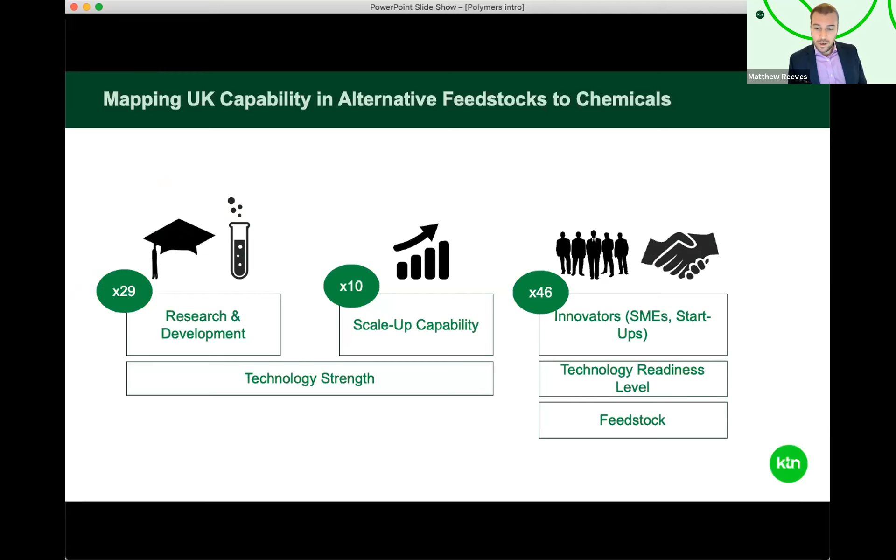So just before we kick off, I'd like to give you a brief overview of the context of the webinar series. Essentially, we are asking the question, which feedstocks will we be using to produce chemicals in 2050? One of the initial activities by my colleagues was to map out the research, innovation, and support work that's going on in the UK right now. And this map is available to view on our website, so I'd recommend going and checking that out.

So if we come back to the central question, the answer will greatly depend on the state of the oil and gas industry in 30 years' time. So one scenario that we can imagine is that oil and gas remains the central feedstock for the chemicals industry, and we achieve net zero by reducing energy consumption and capturing carbon emissions. But in another scenario, we drastically reduce our use of oil and gas and switch to other feedstocks like biomass, CO2, syngas, and/or waste polymeric materials, which expands the number of ways in which the industry can lower its carbon footprint and produce chemicals more sustainably.

But of course, to switch to alternative feedstocks like this and to use different processing technology on a large scale is not a trivial exercise. So what we're trying to do here is to bring together all the relevant stakeholders to facilitate the understanding of these new value chains, to identify the appropriate chemistry that needs to be carried out, to identify what some of the localized opportunities are, and to encourage different technologies and disciplines to come together and make the business case for change, but as part of a wider system.

And we can start exploring these issues today as part of a conversation around using waste polymeric materials as a feedstock. So without further ado, I'd like to bring in our first speaker, Dr. Martin Atkins, CEO of Poseidon Plastics. Over to you, Martin.

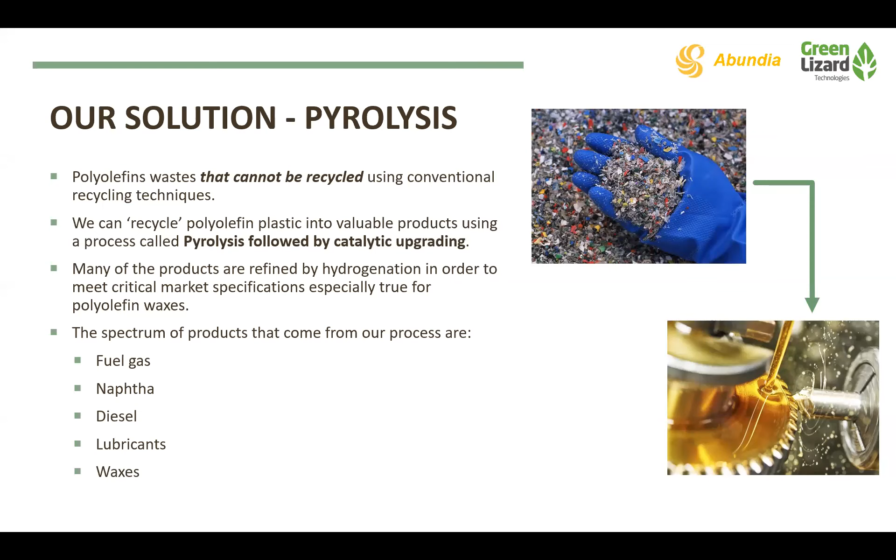So we look at the upgrading of the products, and most of these are by hydrogenation. So it gives us opportunities to move into the use of green hydrogen, which is something else we've been following closely with the KTN and some of the other activities in the UK. So we're really starting from the supply chain at the front, and we're looking at our partners developing the downstream with us for those products. So this is a bit more of the value chain that I've explained about there.

In one particular mode of commercialization, we're working with RiverRidge in Northern Ireland, which is a waste site. So we take waste directly from the MRF. It's collected. A lot of that waste is collected from the blue bins or the green bins or the black bins, as I'm finding out now, are also used extensively in certain councils. So we work with the site. We use real feedstocks that have been through the separation process.

The technology that we use is very robust. For the first generation plant, we use a flow system. They're rotary kiln-based systems. There'll be two approximately 20,000 ton flow trains on that particular activity. Our second generation, which is under development here in Teesside, is actually a very compact pyrolysis unit, quite an innovative reactor design, and that's primarily used to get very high yields of waxes.

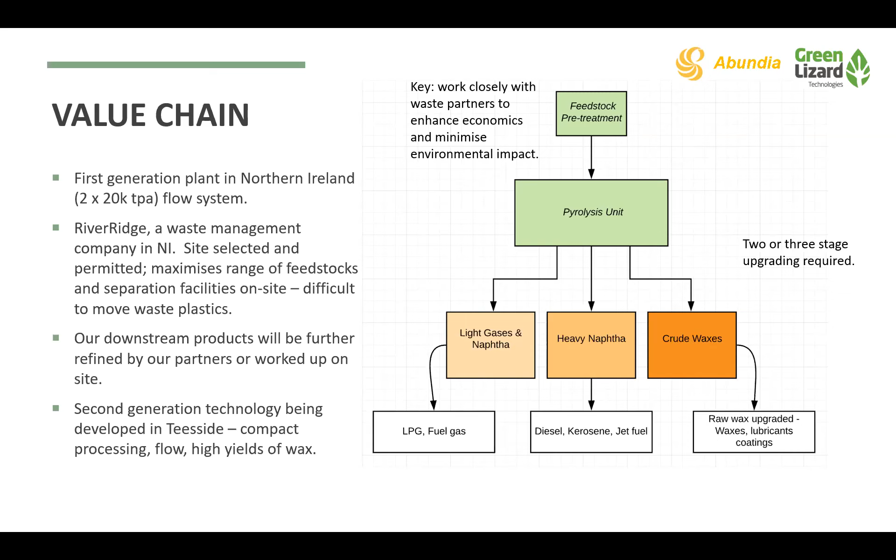But you see, when we go through these technology blocks, feedstock is very important. Our pyrolysis unit has to be robust to all the different types of contaminants that are in the feedstock to a certain extent. A lot of those impurities can be removed by units in the waste treatment unit. But things like PVC, you'll never get to 100% removal of those. You'll never get 100% removal of biomass, contaminants, bits of paper, and so forth. So the pyrolysis unit, whichever you look at, needs to be very robust to take advantage of cheaper and advantaged feedstocks at MRF.

So as I say, we're really looking at producing these waxes as the long-term goal for this project. It's a huge market. It's a $6 billion market. They're used in all sorts of applications. But on the way there, of course, you do make diesel, you make kerosene, and you make LPG.

So depending on the partner mix and depending on the technology that needs to be developed and the markets that need to be served, our technologies offer a completely, I guess, flexible process all the way from LPG right the way up to paraffin waxes. Our second generation is focused on a much more improved and compact system. So that was a run into plastics with Green Lizard and Abundia.

We're now coming on briefly to the Poseidon Plastics. This is a venture we set up about 18 months ago. This is already at Teesside. We've got our team here. It's in the Wilton Centre, so it's in the manufacturing catapult, and we're looking to put the UK's first chemical recycling of PET plant at Teesside here.

So again, I think a lot of you have seen this slide, or seen the top bit of that slide, many times. It takes us through the whole supply chain of PET resins, from the crude oil feedstocks right the way through to the resin manufacture. All different types of products, whether it be shirts, fibers, films, trays, bottles, coloured bottles, clear bottles. They're all produced and used in the markets.

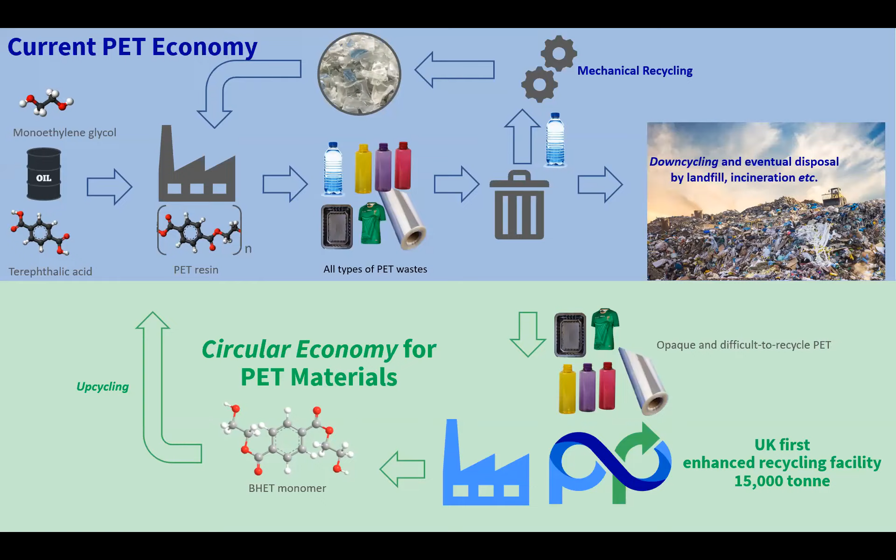So we're just finishing the feed study. We're going into detailed engineering, design and cutting steel early next year for the UK's first 15,000 tonne plant. Our technology is based on a glycolysis route. So we have a proprietary catalyst system and a solvent system in there. We use ethylene glycol to react with that catalyst with waste PETs of various descriptions. They then go through various separations where we purify the BHET for use in virgin PET production, and all the coloured components and contaminants are recovered or reused in another part of the process.

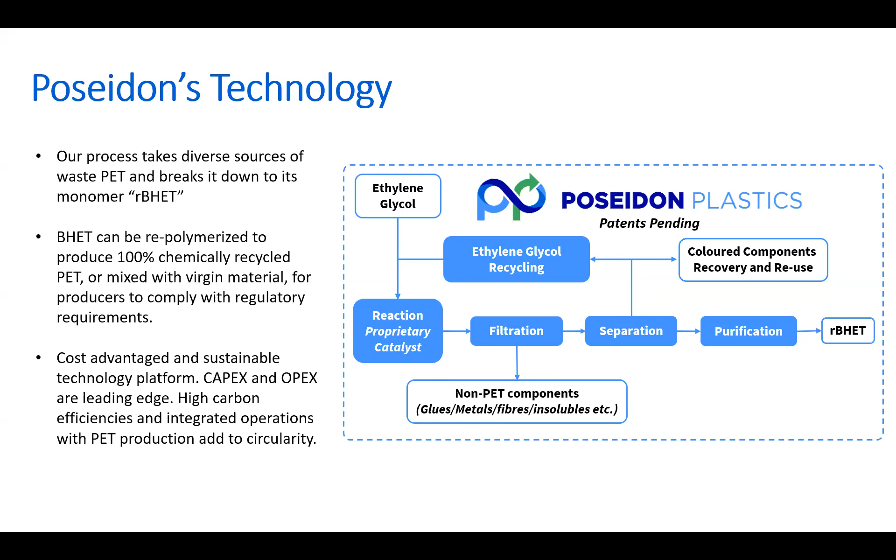So we can depolymerize virtually all PET waste, even mixtures of PET waste, and we focus with our partnership on making sure that the CapEx and OpEx is leading edge, best in class. It's a fully integrated concept we have with all PET production facilities, and that way we can bring down the cost. The key thing of our technology is that whether you're starting from fiber or mixed feeds like jars or trays, we basically have full circularity in the PET with our waste materials.

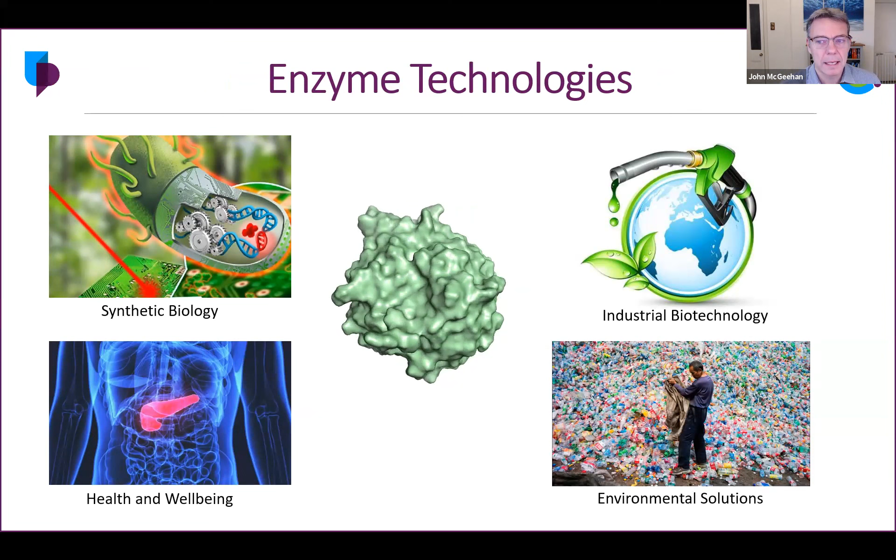It's really super. So yes, basically I work on enzyme technologies, and we've been working at Portsmouth University on enzyme technologies for a couple of decades, actually. We cover a large range of different applications, from synthetic biology to healthcare, industrial biotechnology, and more recently, we've moved our focus towards plastics. Just as context here, when we're looking at biological depolymerization, we're looking at all sorts of polymers. So this is natural polymers like DNA or cellulose, lignin. So we've spent an awful lot of time on cellulose and lignin depolymerization.

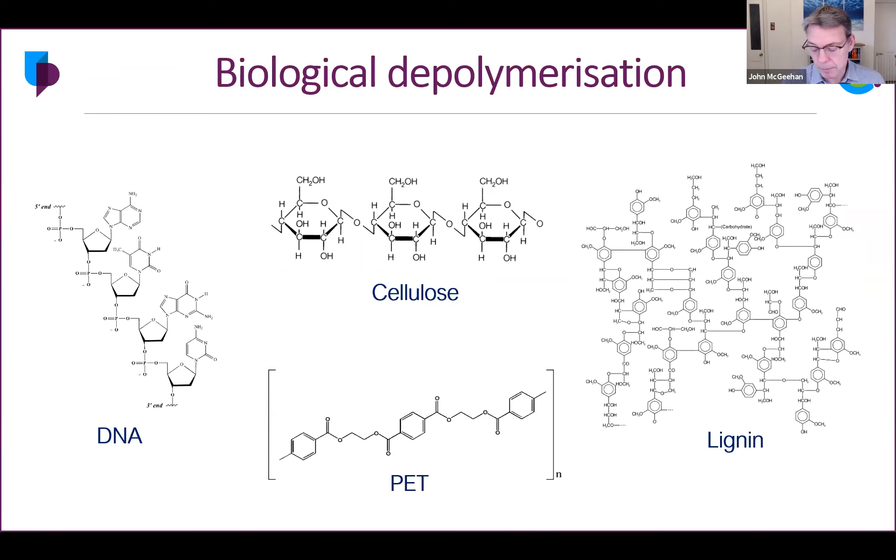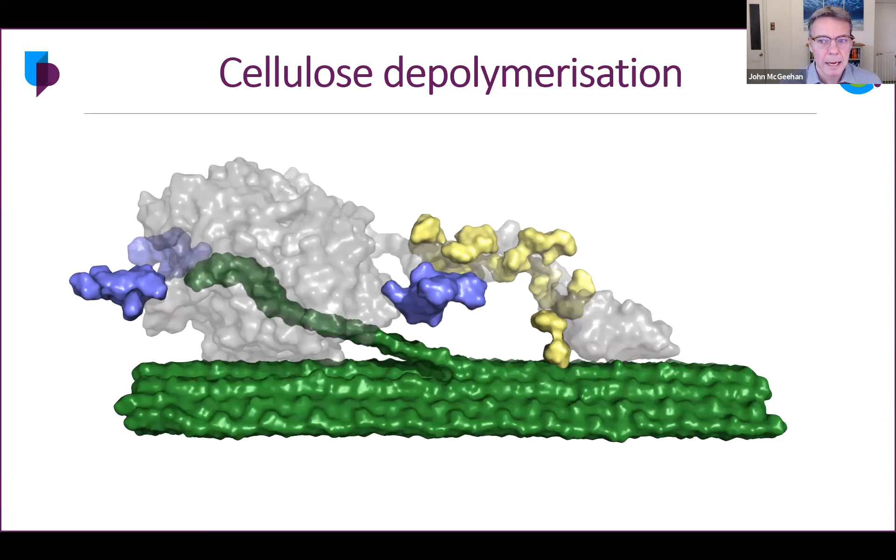And then more recently, moving to PET, you can see that the jump between these polymers is actually quite straightforward. You just need a different enzyme class, focusing on a different type of bond. And normally there are systems out there in the environment that you can bring into the lab and push towards industrial applications. So that's really what we're about. We had a couple of decades worth of work on cellulose depolymerization, and this was to make sugars from the green stuff here, the crystalline cellulose. Of course, oil and gas prices are such that those cellulosic biomass facilities became very difficult to operate competitively, but maybe that will come back one day.

Lignin depolymerization is a bit more interesting at the moment, because rather than slating this for energy, we can convert this to some very high value chemicals for upcycling into really interesting products, including chemicals, composites, plastics, and also fuels as well. But we're really concentrating on green chemistry here. So we're working on a whole range of enzymes to do this.

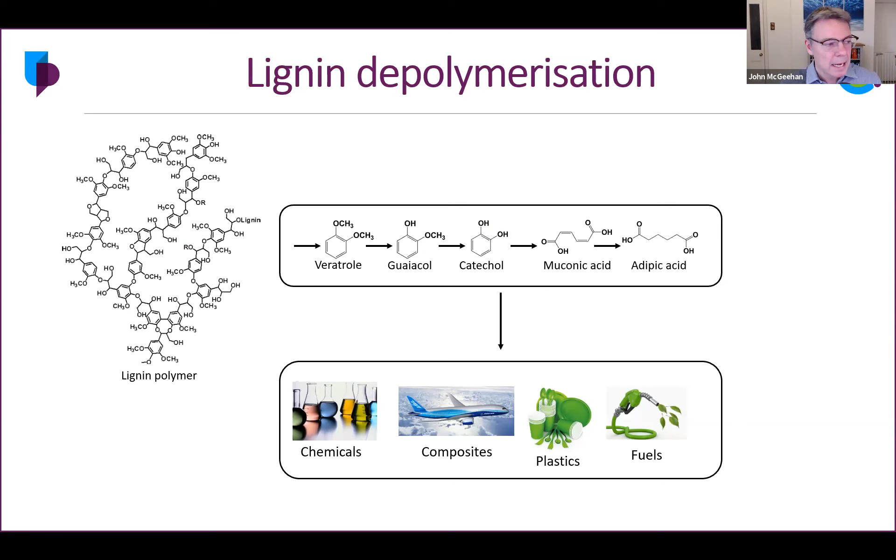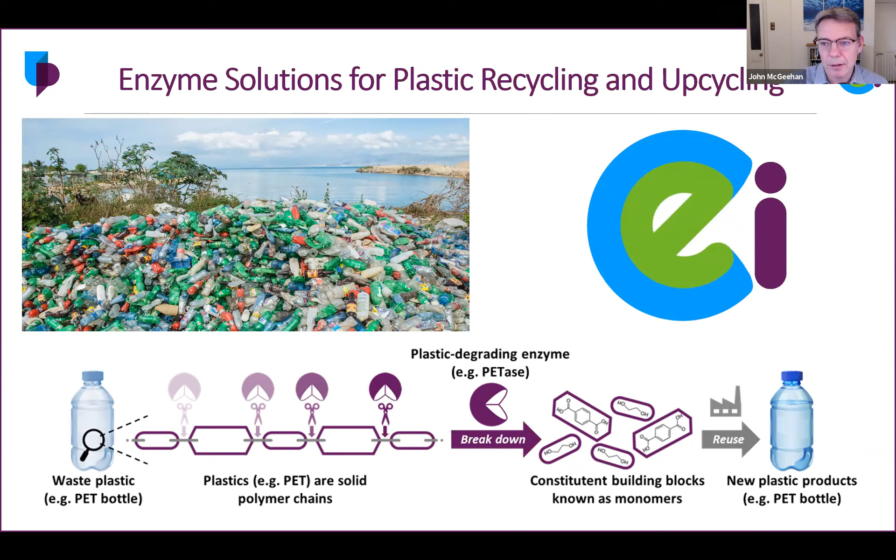And then more recently, following the discovery of that plastic-eating enzyme in 2016 by that Japanese group, we have moved into looking at enzymes that can depolymerize plastics. And we have the centre called the Centre for Enzyme Innovation, principally funded through UKRI, through an Expanding Excellence in England grant from Research England of £5.8 million, which we got awarded last year. That was matched by the university, and we were able to open our centre.

And in the past year, we've hired 15 new researchers from across the world. So there's now about 30 of us, all working on the different areas required to develop all these different types of enzymes and really get them to market. You know, part of the process here is, of course, speaking to the people in this audience.

Okay, so you may have seen some of the press. Our first paper, when we solved the 3D structure of the plastic digesting enzyme PETase in 2018, reached quite a worldwide audience. And we published a paper last month, which I wasn't even sure if the media would pick up, but they did. And again, it went really global, which is good for the profile of this type of technology. And we've had an awful lot of interest from industry following this.

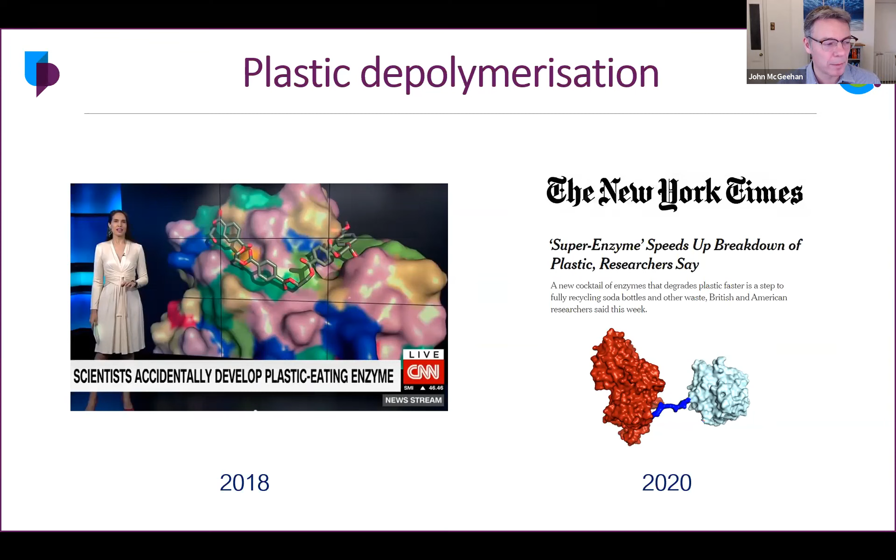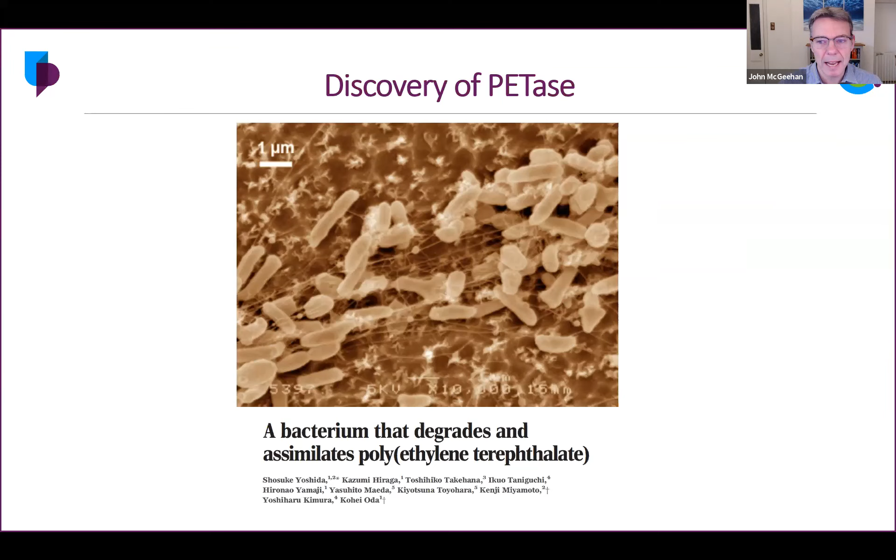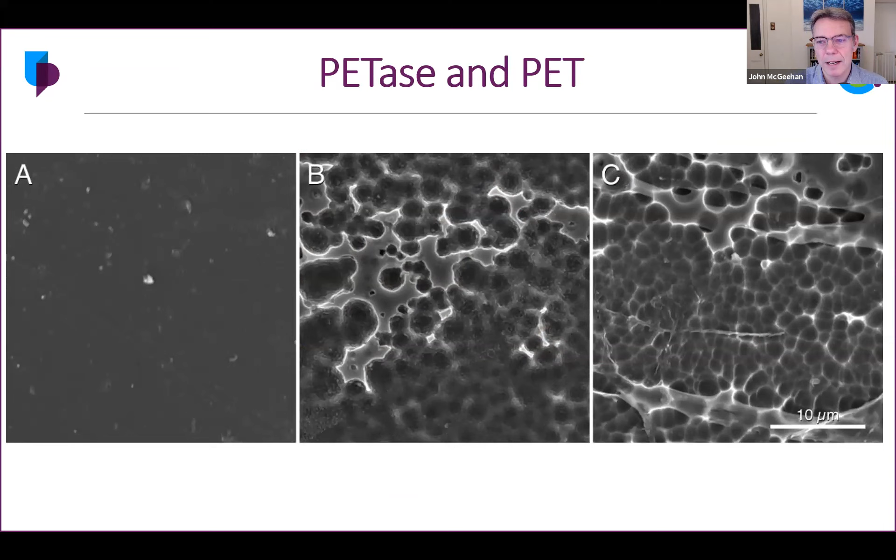And this is based on a biological process that's happening right now in nature. These bacteria here, these little rods, are sitting on the surface of plastic, secreting a couple of enzymes that actually break down the polymers. And these bacteria can then use those monomers as a source of energy and carbon. On the left here in panel A, you'll see the electron micrograph of a PET bottle surface. And then you can see in B here, after about 4 or 5 days, the surface is starting to degrade following the addition of purified enzyme to the reaction mix. And C is one of our engineered enzymes that does this process a bit faster.

And this really comes from an environmental evolution system, because if you look out there, you can see that nature has lots of polyesters naturally occurring. If you look at the surface of green leaves, for example, you'll see they've got a waxy type of coating, and this is a coating called cutin, which is also a polyester. So bacteria have evolved for millions of years to be doing this. What we're doing is looking to see if any can actually tackle aromatic and semi-aromatic plastic polymers instead of cutin.

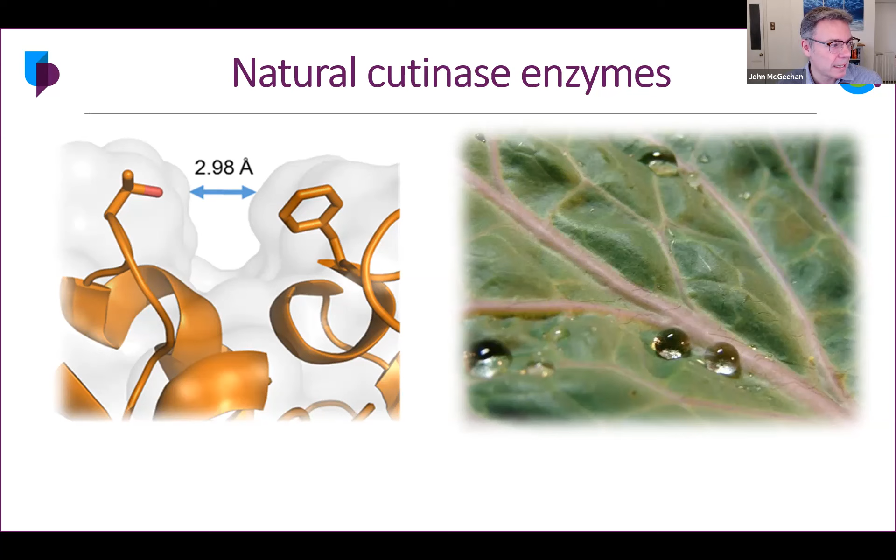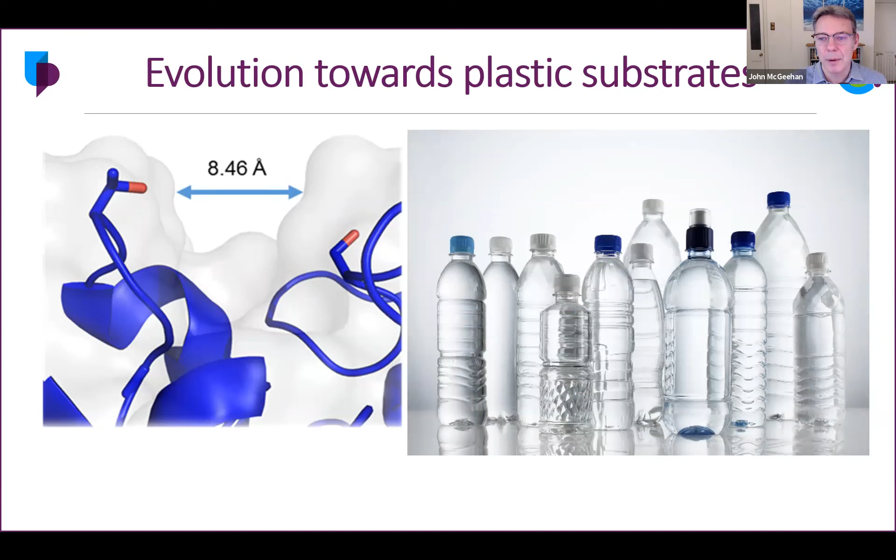And what we can see here on the left is the active site of the natural enzyme called a cutinase that eats the natural coatings of plant leaves. And if we compare that to the PETase enzyme, you can see that it looks very, very similar. It's just the active site is a bit more open, which allows it to tackle PET. And it's actually only a few DNA changes that have allowed this to happen. So we're very excited about the possibility of other enzymes out there in nature waiting to be discovered.

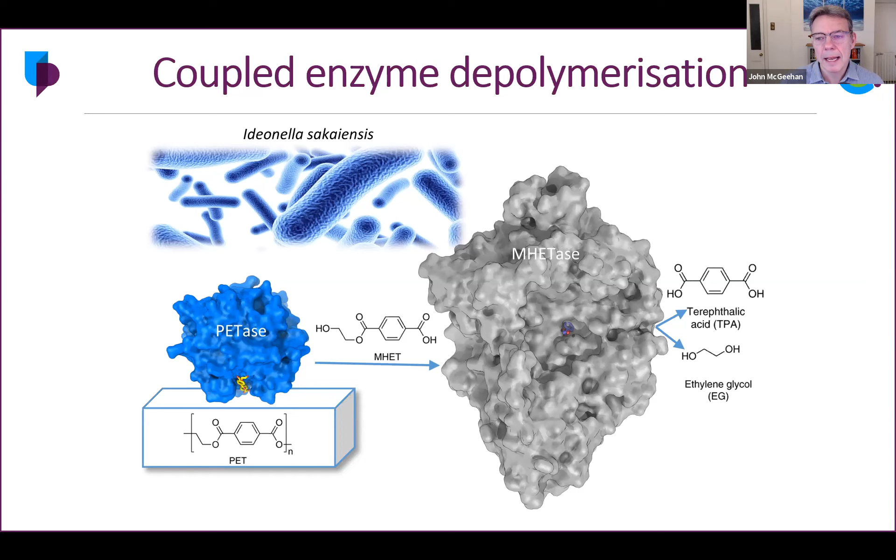There's two enzymes involved in this process. The PETase itself binds to the solid plastic surface, and through interfacial catalysis breaks down the PET to mainly MHET. There's a second enzyme called MHETase. That was the paper we published earlier last month. That breaks down the monomers further into terephthalic acid and down to ethylene glycol as well. And the combination of these enzymes in nature proved very powerful.

So why is this interesting? Well, as we've just heard, through Poseidon using the glycolysis route, this is in some ways similar in that we're breaking down the PET chains into the monomers using these two enzymes. The good thing about this is that it's very low energy. These enzymes operate at very mild temperatures without solvent. There's very low carbon, and there's actually very low waste as well from these processes. So there's no salt-based waste coming out of this.

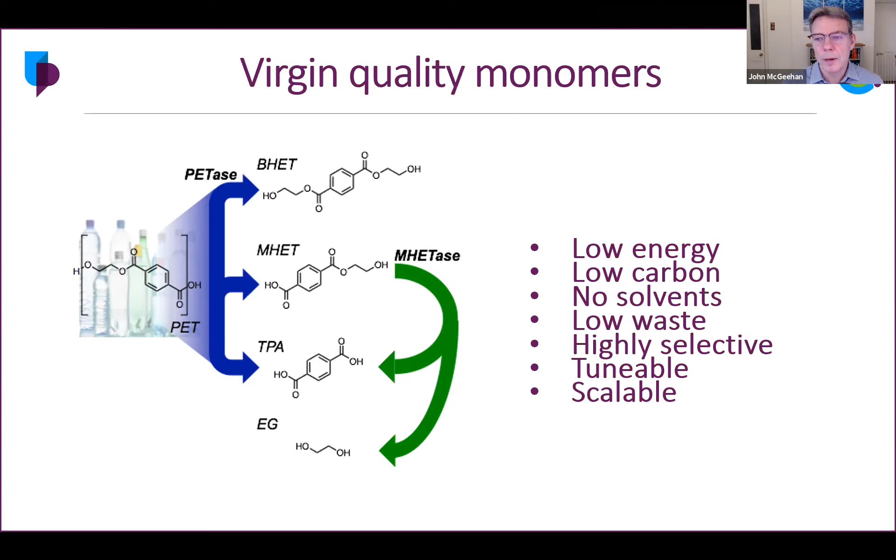They're highly selective, so you can tune these enzymes to tackle different types of bonds and therefore different types of plastics. And they're tunable and scalable. We have all the technology available for scaling up enzyme technologies. They're used in the food industry, biofuels, as I mentioned, and pharma industries as well. And in fact, pharma has come along and helped us to scale things up. So this is our pipeline.

The blue bit here is discovery. We literally go out into landfills and try and discover new bacteria. We've had a great collaboration with Yellowstone National Park, looking in those hot springs for unusual thermotolerant enzymes that we're hoping are going to be a lot faster. We then take those back to the laboratory and engineer them to be faster using biophysics and X-rays and structural biology. We then work with our fermentation colleagues to scale these processes up.

And as I discovered quite early on, speaking to some of our recycling companies, they don't necessarily want enzymes, they want processes. So we've just had a grant awarded from our local enterprise partnership to build back better. So they've given us £1 million to contribute to building 3 new labs at the university. One is a biorecycling laboratory, so we can start tackling real waste streams and mixed waste streams, contaminated waste streams.

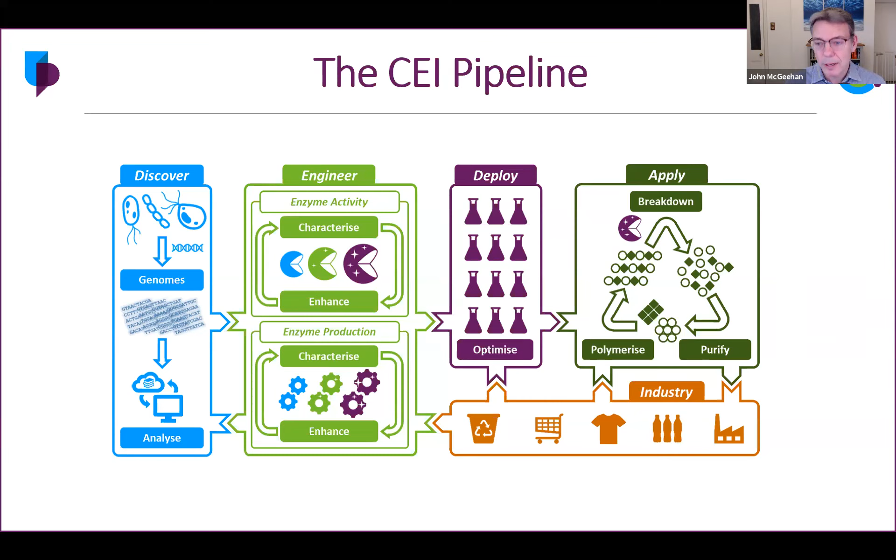Polymer analysis, so that we can really get down to the molecular details of the substrates and the products that we make. A polymer synthesis lab, that will allow us to take those monomers, remake and upgrade plastics, and then test those as well, so we can start to look at the whole process and value chain. We'll also have an innovation suite there run by Rory Miles, our innovation fellow. And the purpose of this is really to get industries in talking about this from an early stage and really try and see how we can work together on this.

So currently we're in plastic number 1. We have some enzymes for potentially plastic number 2. We're working on those, maybe 3. The others are pretty difficult, 4 possibly, 5 really difficult. So I think the message here is that we're going to need a mixture of technologies. We're definitely going to need pyrolysis at some point for some plastic waste streams, but for others, we may be better on low carbon, low energy systems like enzymes. And I'm really interested here about the microwave technology as well. I think there's room for all of these in different streams.

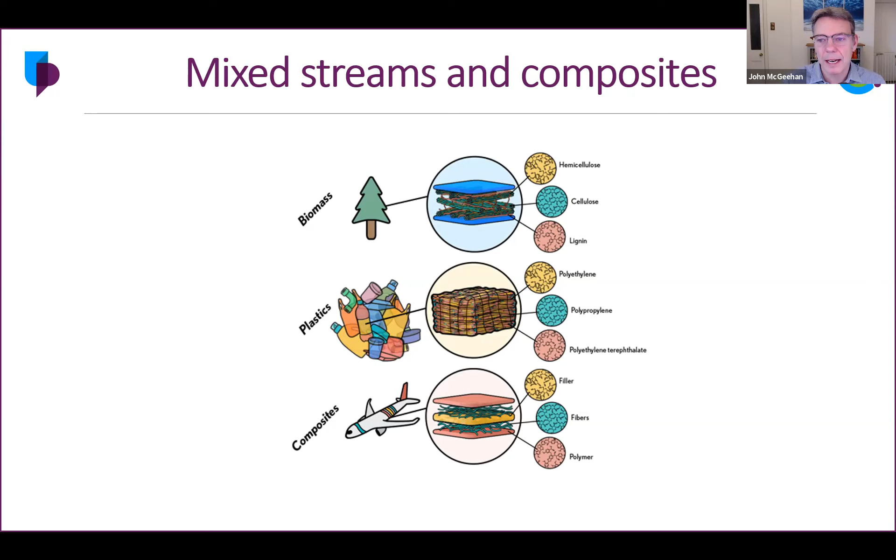The plastics problem is very similar to the problem that's been running for many years in the biomass industry, looking at these mixed, so the equivalent in biomass is laminates or composites, these things we're quite used to doing. So we can either develop single-use enzymes to have a sequential process, or potentially cocktails of enzymes that we can use together to try and tackle some of these more difficult waste streams as well. So just to finish off, our ambitions are to do faster, more efficient and cheaper enzymes at scale. So that's a grand challenge.

We need to widen our substrate and product range from biomass and plastics. And I think using the combination of those things could be really interesting, taking those monomers from plastic, putting in biomass monomers, building up upcycled plastics like fiberglass and carbon fiber and things. It's a really exciting space to be in, I think. Linking these enzymes together, maybe enzymes that digest cotton and PET so they can tackle mixed plastics directly. And then, really industrial applications through partnership is going to be our bread and butter going forward.

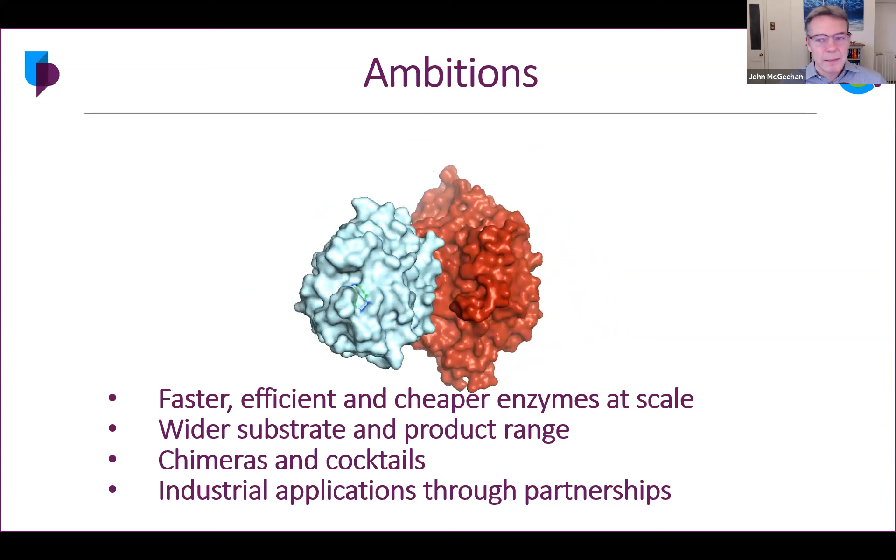At Portsmouth, we are engaged in Revolution Plastics, which is a wider grouping to include things like policy and local community and those sorts of interactions, behavioral change. These things are all part of the process here. So enzymes is just one of the core scientific areas that we have. And we also realized quite early on that we're going to have to work in consortium. And we've just joined a consortium called bottle.org. You can look that up. That allows us to bring together all the big national labs in the US and some of the bigger universities. And this gives us the critical mass to work with some of the bigger multinationals to try and adopt this sort of technology.

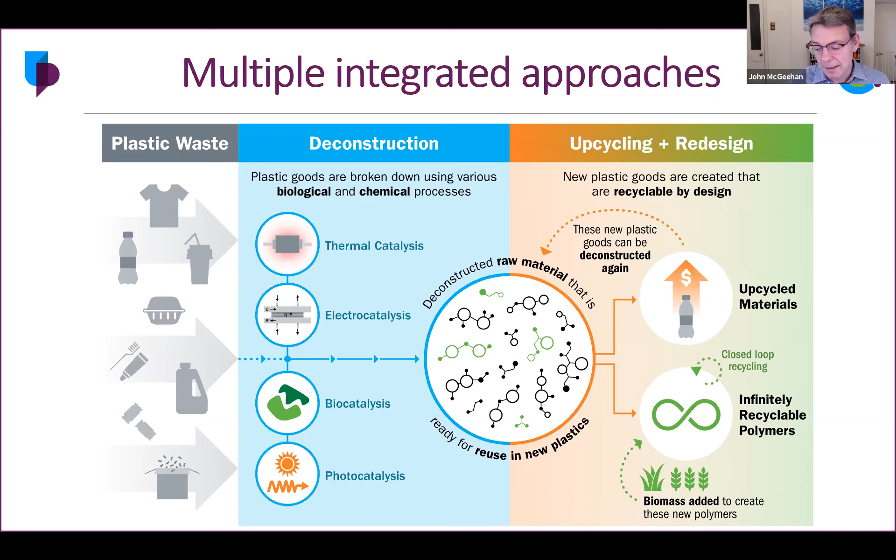And again, this slide just shows the different types of deconstruction technologies that we think about. We're not saying that enzymes is the panacea here. It's one part of the jigsaw, but getting down to monomers is going to be incredibly important. Bringing in possibly biomass to upgrade and really create value out of those waste streams, because that's the economic driver that was just mentioned that we really need to push forward.

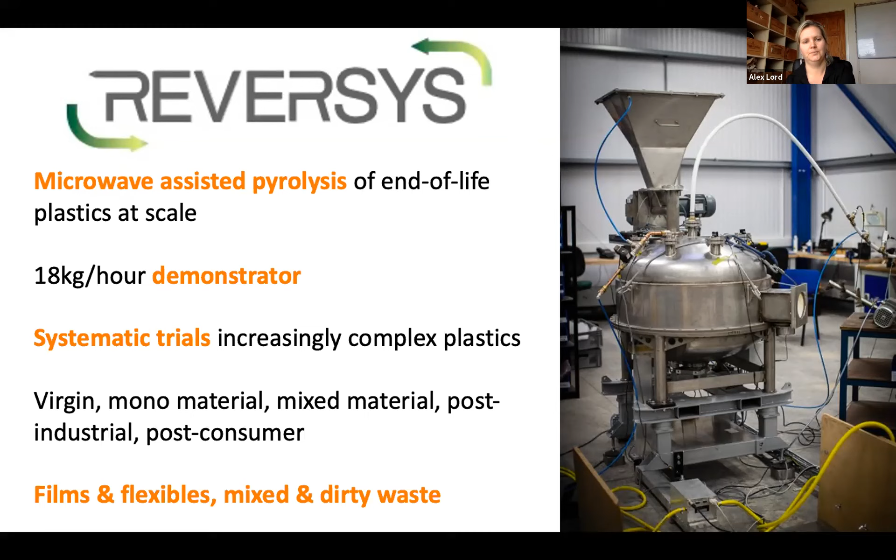So for those who aren't familiar, pyrolysis is the breaking down of plastic through heating or pressure in the absence of oxygen. We use microwave energy to do that, causing the polymer bonds to break and producing oil, gas, and char. We are working here very much in this trial to optimize our product to end user requirements. And that means that we need to have a strong understanding of what those end user requirements are.

Matthew mentioned in his introduction, point number 2 of their objectives was to identify which molecules we need to make for the chemical supply chain. And that's very much key to our process. And I'd be very interested in hearing from people who have specific requirements that they think we may be able to assist with.

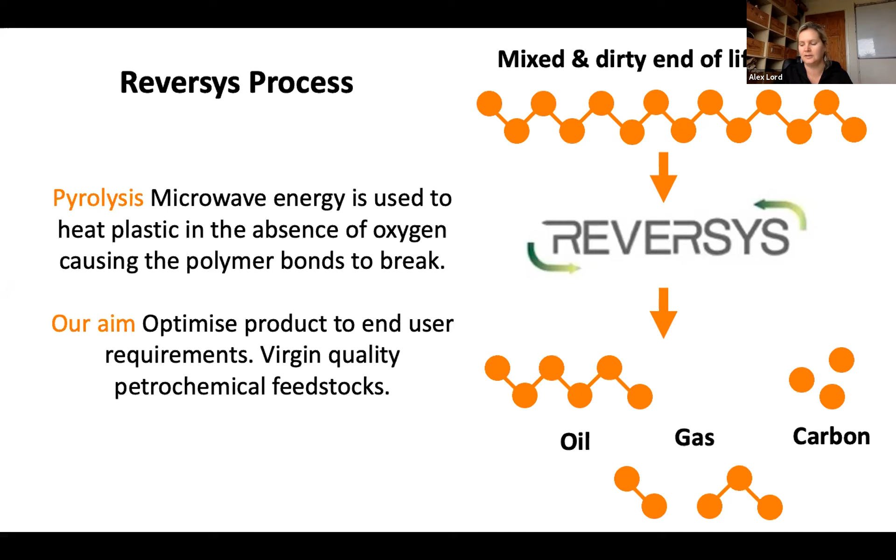So why use microwaves? The big difference between microwave-assisted pyrolysis and other forms of pyrolysis is that it uses what's called volumetric heating. Conventional heating methods work by conduction and convection. So you heat a secondary material, which then conducts the heat into your target material, in this case, plastics. And so it heats the plastic from the outside in.

What that means is that you tend to get hot spots, and that can cause some thermal damage, which gives you products that are not necessarily as optimal as you would wish. Microwave heating works differently. The energy enters the plastic evenly and uniformly throughout the material, heating it across the whole volume simultaneously. So you get a much more even heating of the material.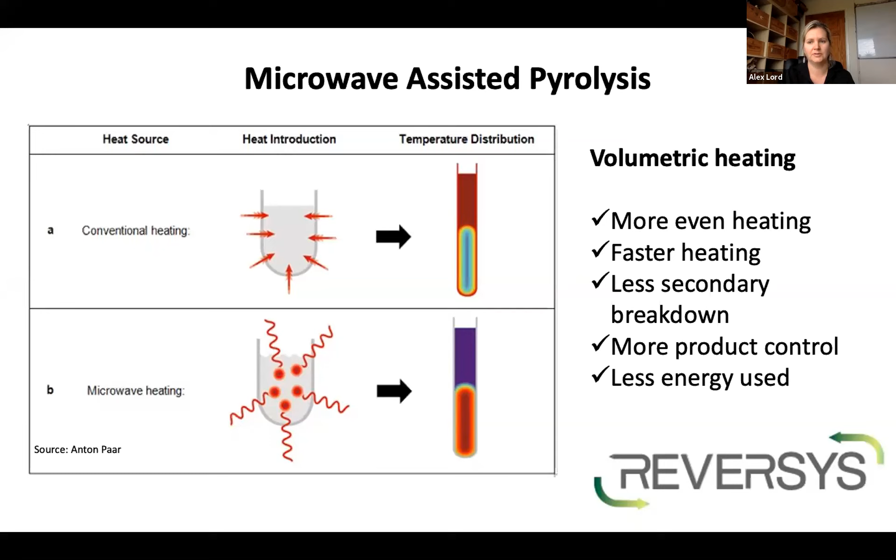You get faster heating of the material. And that means you get less secondary breakdown of the material as it goes. So we've got much more control over the final end product. And ultimately, that means we should be able to use less energy in this process and reduce the carbon footprint.

The other advantages to this process are that it's actually a truly continuous process. So the materials are placed on a conveyor belt that passes through a microwave field. So it's not a batch process. It doesn't require us to power down in between and wait for everything to cool down before we can move on.

As with many other pyrolysis systems, we don't need to pre-clean the material. In fact, microwave assisted pyrolysis has been used at industrial scale for biomass pyrolysis, and having biomass in the system, having these mixed and dirty plastics, can actually help with the process. It's an extremely adaptable process. Because we're using microwaves, it's electronically controlled.

That means we can control things like the amount of power that's going in, the time that the feedstock stays within the power field, the residence time within the reactor. And what that means is that, depending on the feedstock that we know is going in, we can actually program our system to specifically tailor it to produce the product requirements that we have set.

It also means that we can have electronic feedback systems within Reversys that allow us to have very fine control of the process. So we can flip the power on and off as we need to control the temperature at a set level.

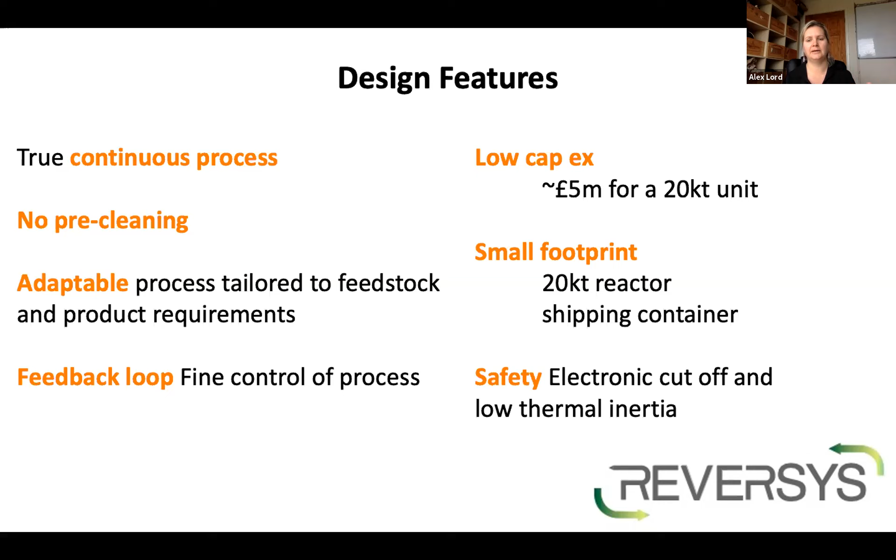So, as I said, a key thing for us is to really understand which molecules need to be made for the chemical supply chain and where this fits with our process. Now, as we do our trials, we'll be getting trial results out from this, and we'll have very detailed analysis of the products we're able to produce. And as I said, one of the things we'll be looking to is whether we can produce certain oligomers and so forth that we can actually control and consistently produce.

And so we're really interested in hearing from anyone who thinks that this technology may be of interest to them and who would be willing to share their chemical requirement specifications with us.

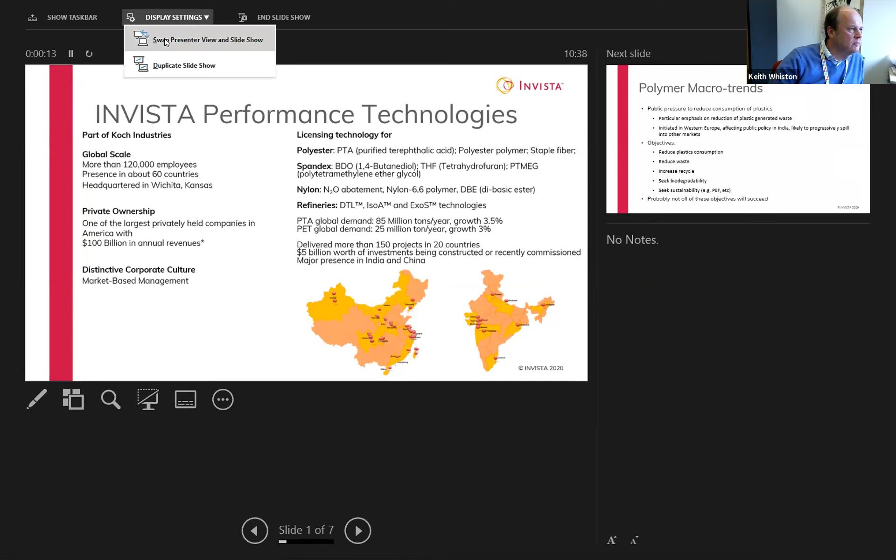Is that okay, or am I sharing still? You just need to go to display settings again. Oh, and, yeah, swap it over. There we go. Okay, right.

So this presentation, first of all, I'm going to briefly introduce the company that I work for and our business. And then the rest of the talk, there's a little bit of repetition in it. Obviously, it's the last talk in a series of talks about polymer recycling and polymer feedstocks. But hopefully I can provide an emphasis and a point of view from the company about particularly the PET area, where we think the status and the future of chemical recycling, in particular PET, is.

So I work for INVISTA, and specifically for INVISTA Performance Technologies. We're part of Koch Industries, which is a large global privately owned company headquartered in the US. INVISTA Performance Technologies is the licensing arm of INVISTA. We're active in a variety of different value chains, which are articulated there on the slide. Spandex, we sell BDO manufacturing technology, THF, PTMEG, also in the nylon, particularly the nylon 6/6 value chain. We also license refinery-based technology into refinery processes as well.

But obviously today, the area that I'm going to focus on is the polyester value chain, which is a big part of our business. We sell PTA, that's purified terephthalic acid process technology, polyester polymer and staple fiber technology globally. We've delivered over the years about 150 projects in 20 different countries, principally these days in China and India. You can see I've got a map down there of where we've licensed technology all over China and pretty widely in India, mostly in Maharashtra province there, which is where the chemical industry is based. And at the moment, we've got about $5 billion worth of investment being constructed or recently commissioned based on technology licensed from ourselves. So that's who we are.

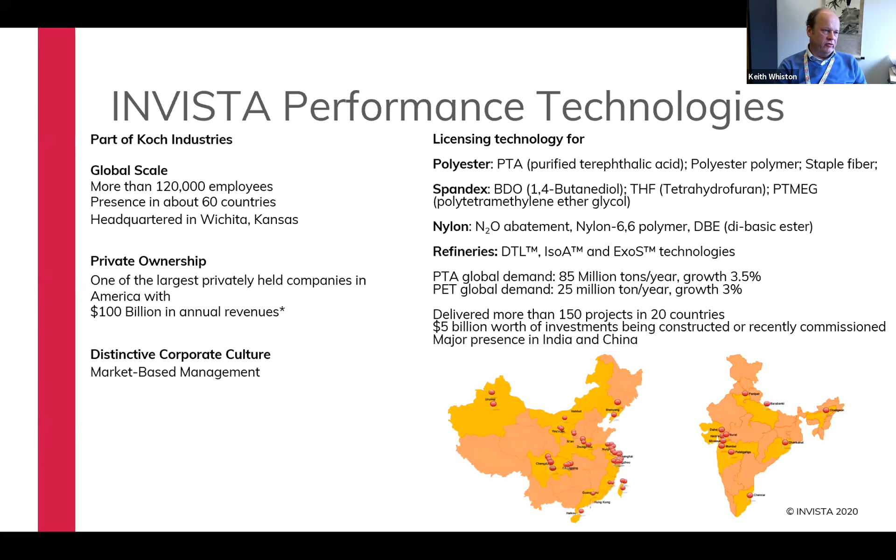But before we leave the slide, I want to emphasize something here, which is really important when we're thinking about any of these technologies concerned with recycling and reuse of polymer, which is to get a feel for the size of the market here. So the global demand for PTA is approximately 85 million tons a year, and notwithstanding any hiatus associated with the current coronavirus tragedy, that's growing at about 3.5% per year. So it's worth stopping and thinking about that, right? Because that equates to an annual volume growth in PTA of about 3 million tons. So the world consumes about 3 million tons more PTA every year than it did the year before. PET also has experienced over the years a consistent and strong volume growth. It's an enormous market. So I'll talk about this. Everybody on the call, I imagine, knows this, but I'll articulate it. And Martin mentioned some of this earlier, but I'll go through again.

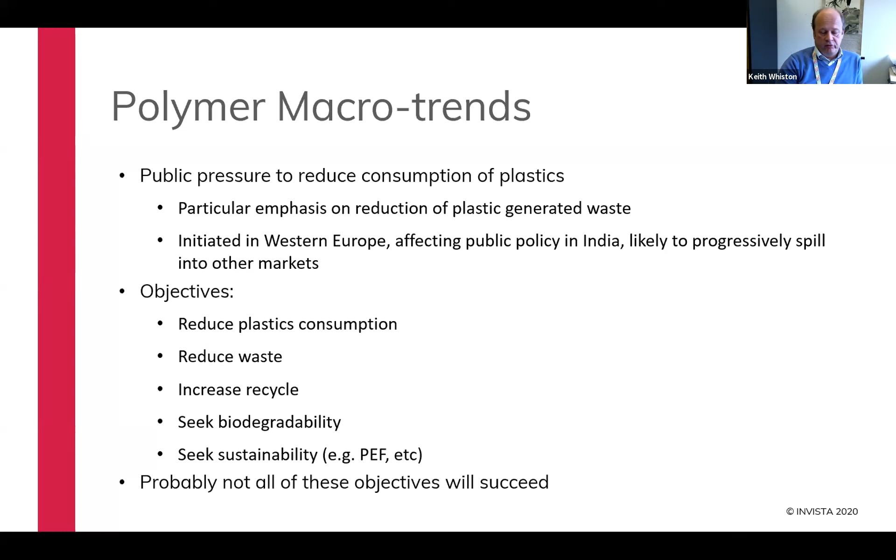So what are the trends then in polymers? Well, there's public pressure now to reduce the consumption of plastics, with particular emphasis on reducing plastic-generated waste. That's been initiated in Western Europe, but it's affecting public policy in India, and it's likely to progressively spill into other markets. So what are the objectives here? Well, the objective to reduce plastics consumption, to reduce waste from that consumption, to increase the level of recycle within plastics, to seek biodegradability. I had a talk earlier focusing on that, so that polymer and plastic can actually be more benign when it finds its way into the environment. And also to seek sustainability and alternative polymer materials that come from biomass type sources, preferably cellulosic biomass, but also potentially sugar as well, which is easier in some cases, but may not be the best thing. But realistically, we think not all of these objectives will succeed, but there they are.

So what are the consequences for our business for PET? Well, the brand owners are setting targets for recycled content in packaging polymer, currently aiming for up to 50% recycled PET in bottle polymer. But they're very unlikely to compromise on quality in terms of materials going into particularly food contact applications. We're also trying to pursue an agenda for biosourced polymers, although our point of view is that it does seem to be stalling over the last few years, perhaps because of the sheer scale required to profitably commercialize this kind of technology. But that's our observation anyway. So we expect this to drive demand for high quality recycled PET, but the market will not in the short term be able to satisfy that.

We expect there to be pressure to switch to more recyclable polymers across the plastics industry and away from unrecyclable, or at least difficult to economically recycle, polymers such as PVC, polyolefins, polystyrene. And probably equally, if not more importantly, the design of packaging, we can already see, will be optimized and simplified to maximize the potential for straightforward recycling. We're likely to see the introduction of more deposit schemes in Europe, and that will lead to a high quality PET recycle stream. There's going to be continuing increased pressure to develop bio-derived and biodegradable packaging polymers. And of course, we expect to see legislation in numerous territories in this area.

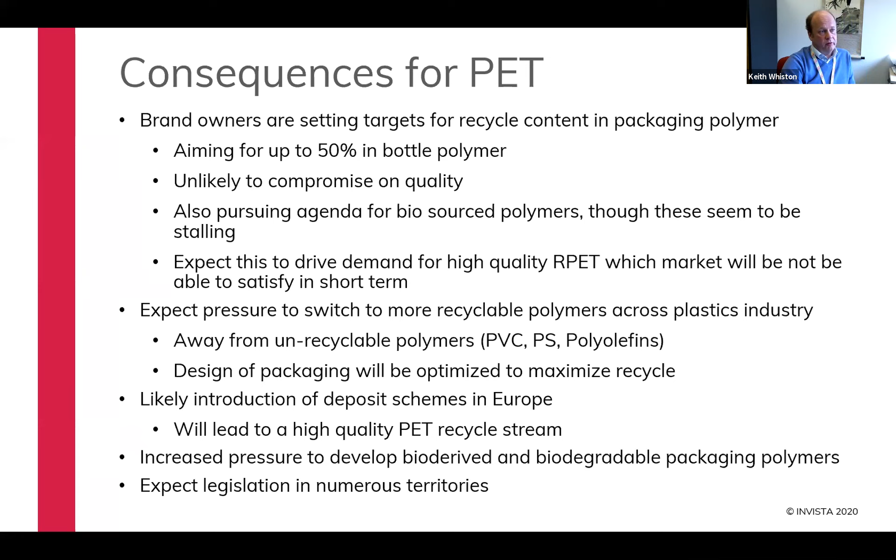So let's go back and talk briefly about definitions. I'm sure most people know this, but we need to discriminate between what is mechanical recycling in this context and what is chemical recycling. With mechanical recycling, we're talking about grinding, melting and pelletizing PET that's been previously used.

Practically speaking, as we sit here, material of that type usually ends up being used in staple fiber applications, if it's come from a food contact or bottle application. So it's sort of downcycling often.

Chemical recycling involves melting, filtering, and depolymerizing in a manner that Martin described earlier to make BHET, DMT, or TA. I'm not talking about going further back up the thermodynamic chain to make pyrolysis material. I'm talking about methanolysis, hydrolysis, glycolysis, or potentially reaction with other alcohols. That's what I mean by chemical recycling in this context.

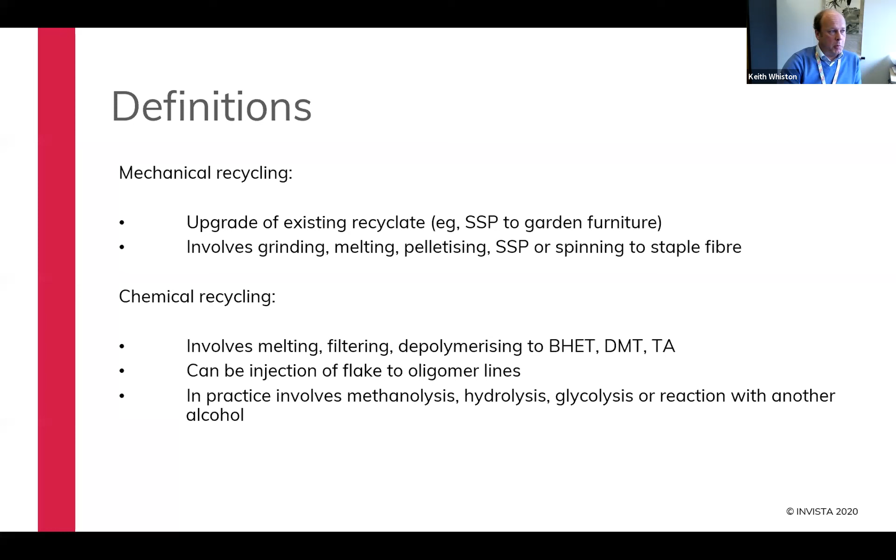So what do we think about the future of this type of technology? Well, the demand from brand owners for recycled content in packaging is expected to drive an increase in chemical-based recycling going forward. There are multiple chemical recycling technologies being developed. We've heard about some earlier, but there are challenges, particularly around cost and also critically around product quality.

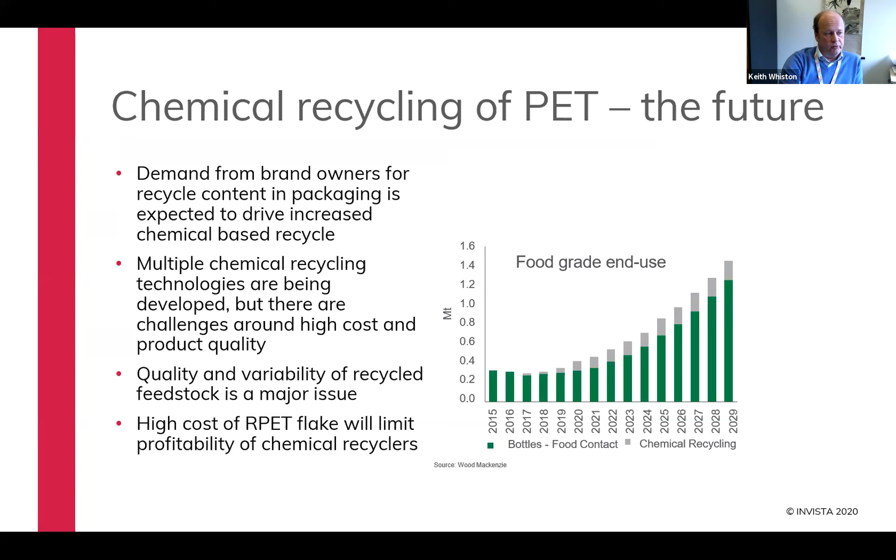It's very unlikely that brand owners and users are going to put up with lower quality materials than are used currently. So the technology has to produce material that is comparable with virgin quality. Quality and variability of recycled feedstock is currently a major issue. And the high cost of recycled PET will limit the profitability for chemical recyclers. It's currently more expensive to buy rPET flake on the market than virgin material, so that's a kind of market distortion.

So summarizing, PET is highly recyclable, much more so than polyolefins and other polymers. Public and political pressure will lead to increased pressure to recycle or reuse plastic waste. We're likely to see increased polymer collection rates all over the world, deposit schemes being introduced, and more sophisticated sorting technologies as investment increases. That's expected to increase the purity of recycled streams, which is beneficial.

But in some circumstances, alternatives to recycling may be the better, more economic and more environmentally beneficial option. Brand owners are seeking to increase recycled content in their packaging, and that's driving an increase in the price of recycled PET. Chemical recycling is a key route to enable this without compromising packaging quality. Without it, you're not going to be able to recycle a large proportion of the material at the same level of use, particularly in food contact use.

Pressure to increase plastic recycling is unlikely, we think, to have a major effect on the demand for PET, with increasing recycle partially offset by substitution of PET for other polymers because PET is inherently more recyclable.

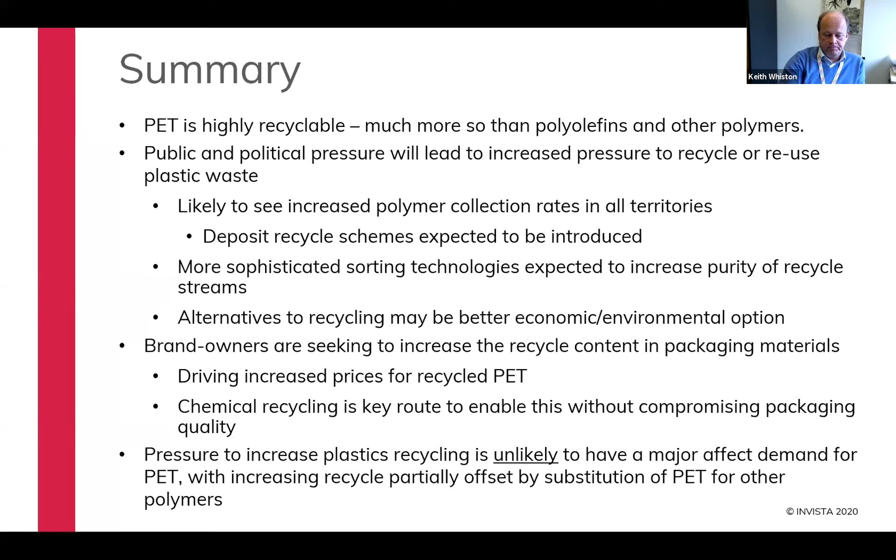So finally, what's INVISTA's interest in the area? We are active in this sector. We're interested in evaluating potential recycle routes with partners, and we're currently working with multiple partners to identify potential advantaged recycle technologies. Many technologies are under development and multiple are being commercialized at different scales. IPT is also seeking to understand how to improve the quality of chemically recycled polymer, since we see this as a key issue to meet the needs of brand owners and our current technology customers. That's all that I have.